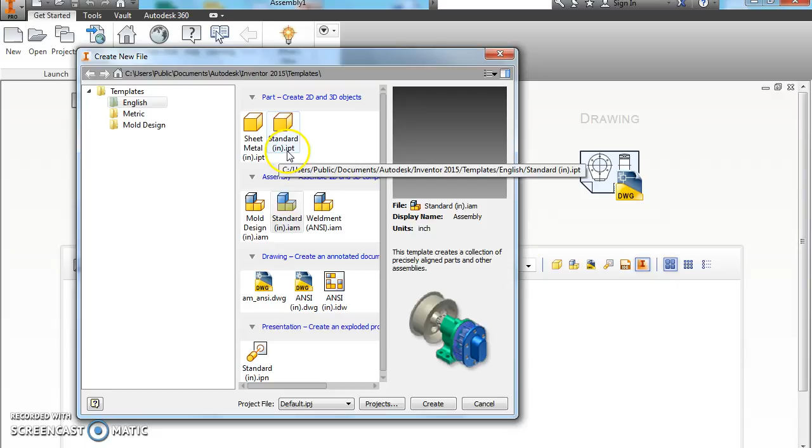Which is inventor assembly, is what that means. So click that, create. It's going to look different for you.

Okay, yours may say place from content center at the beginning, and if it does, you don't want that, so you need to change it to just say place.

Okay, and it's going to bring up, hopefully you've saved everything in that correct folder like I've asked you to do throughout class. Okay, so it brings up all your files.

You can see I've got multiple files of everything I've done for you all when making these lessons and things like that.

The first thing we want is the assembly plate. Okay, make sure it has the 3 spaces in it. One should be a square, one should be a circle, one should be a triangle.

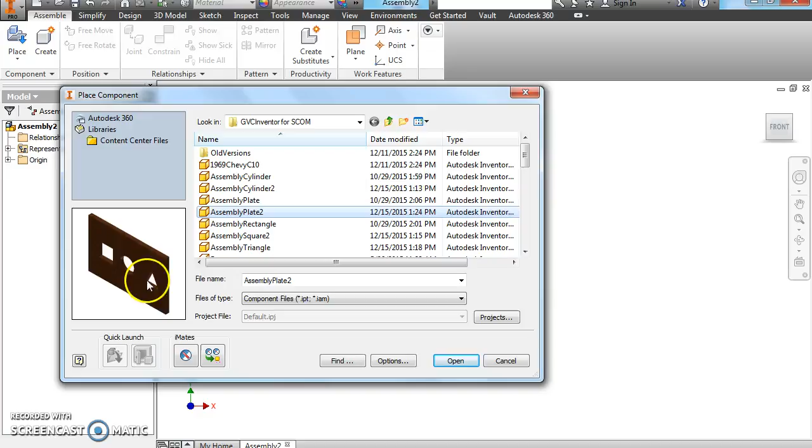Hit that and open that, and it's going to look really big. Click it one time, it places it. Then you have another one. You only need one of these, so right click and check the green check that says OK.

So now you have your plate that you've made. Okay, this is going to be the basis for our assembly file.

If you click and hold, it will move around. Okay, that makes it tough when we do constraints, so we don't want that.

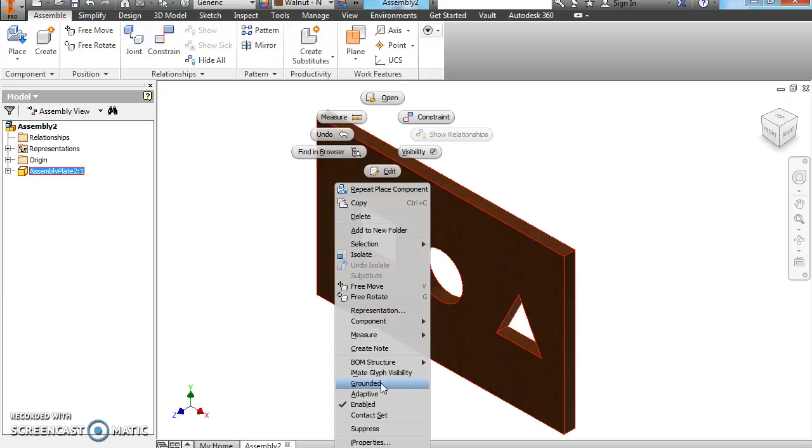So what we're going to do, click on the figure, right click, and where it says grounded, click that. And what that does, it makes it stay. You can click and hold now, it doesn't move. Right click, you can check and see that it's grounded. Make sure you do that before you place any more files.

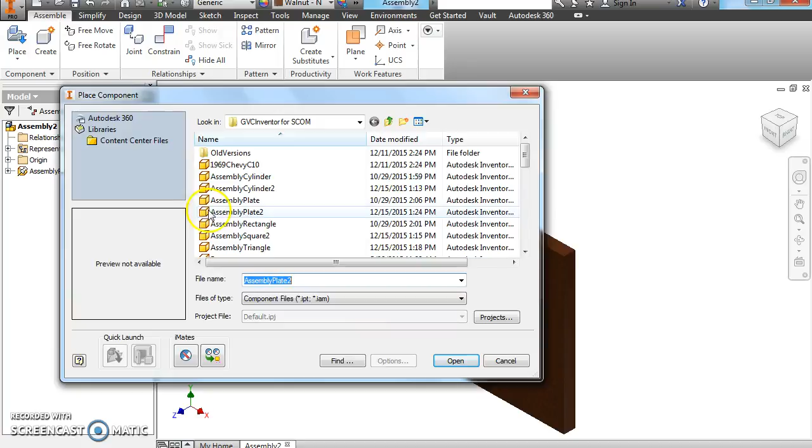Okay, we're going to go and we're going to work left to right here. So the first thing we want to place is the square. Okay, should be a 2 by 2 square. I think we extruded it 3 inches, maybe 4.

Hit open, put that in there. You only want one, so again, right click and OK. You can move this around and go anywhere.

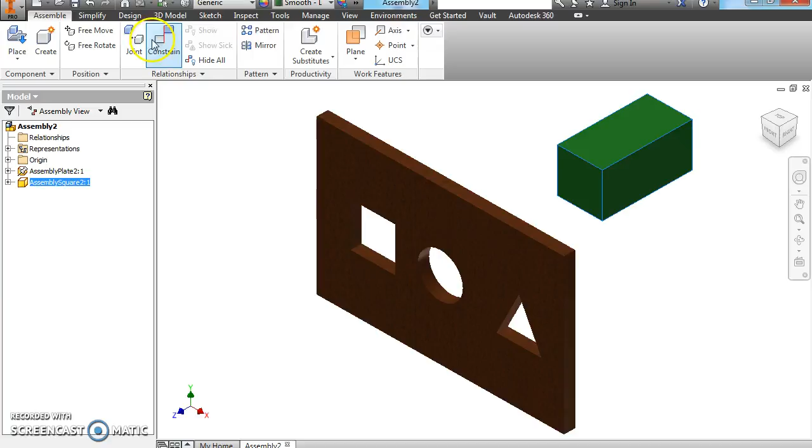Our goal in this video, we're going to put the square peg, I'm going to call it, in this hole. And the way we do that is by constraining it. Okay, with a rectangle, or a rectangular prism as this would be called, you have to constrain at least 2 sides.

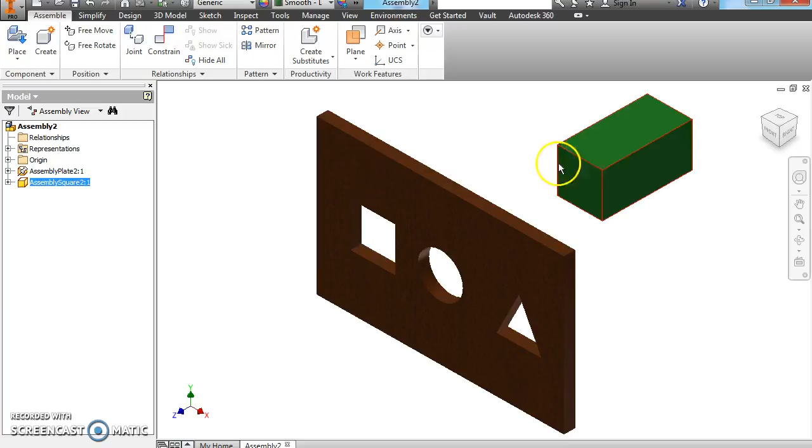Okay, just for extra practice we're going to do all 4 so that you're familiar with that, and when you do your playground later you'll make multiple part files and then do an assembly and have to do constraints as well. So click on constrain.

You want to mate, and you want to keep it a mate. You don't want it flush because we want this to move still. Okay, now this is where it gets very difficult here, so you have to maybe even make a little list and check it off as you do it. You're going to be moving things around a lot. You're going to use the trackball to zoom in a lot and things like that.

The first thing I'm going to do, I'm going to constrain the top of this. So I click that. See how the arrow's pointing up?

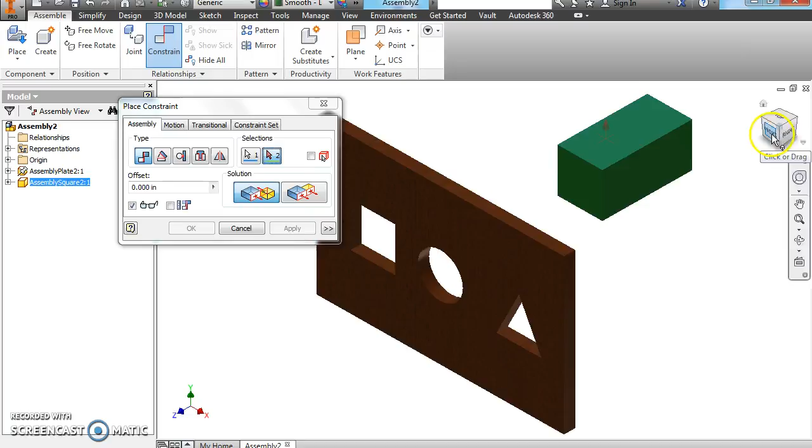Now you've got to move your mouse because I want to see not this line, but I want to see the top face there. So I'm going to grab and hold my cube and I can move it, and then I want that, so I'm going to zoom in with my trackball.

I'm going to click that. Should hear a little popping sound. Hit apply and close that.

So now watch, it moves around a little bit, which is good. So the top is constrained here.

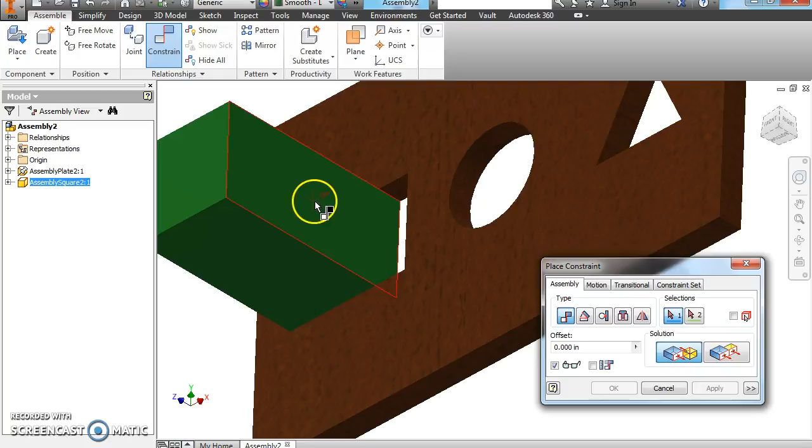Okay, the next thing I want to constrain is this side. Let me move this. This side right here...

...to this side. And again, you've got to be good moving this view cube around, and also you can zoom in and out. It makes it much, much easier. Again, you hear that pop.

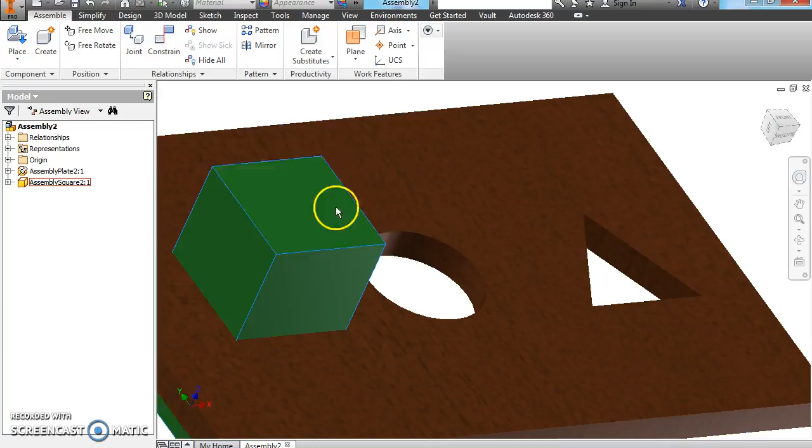And now it's staying in there. Okay, but just for practice, I want to constrain these other sides because when you do more difficult files, you need to do it each way. So click on this side, and we know it's going to be stuck to here.

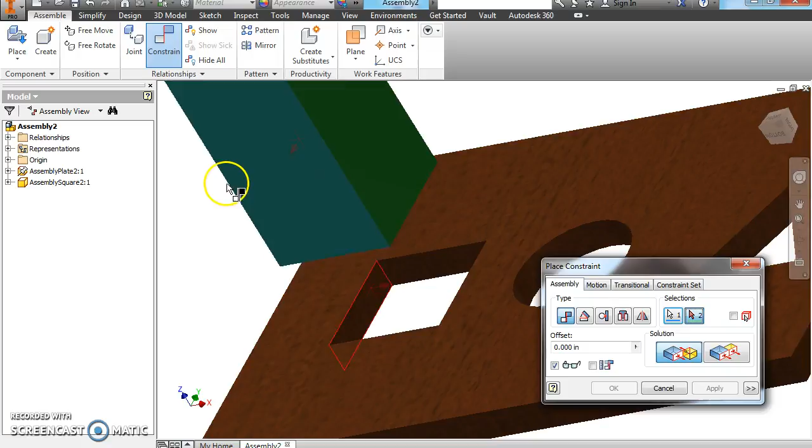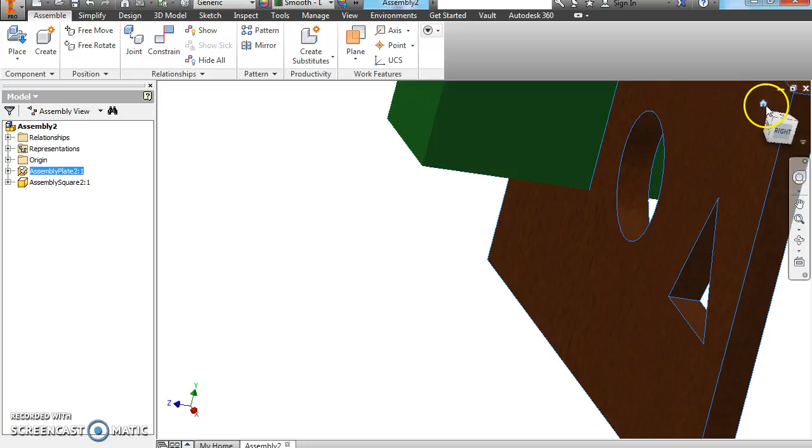Hit apply, and let's see, it still goes up and down through there. We've done the top, we need to do the bottom. Constrain this face. And sometimes you got to be real careful to this face and hit apply. Okay, so now my square prism, or rectangular prism, is going in there. It won't move anywhere else, which is what we want.

If this was a pegboard toy, you'd use a little hammer, knock this down. Okay, you probably did that as a little kid.

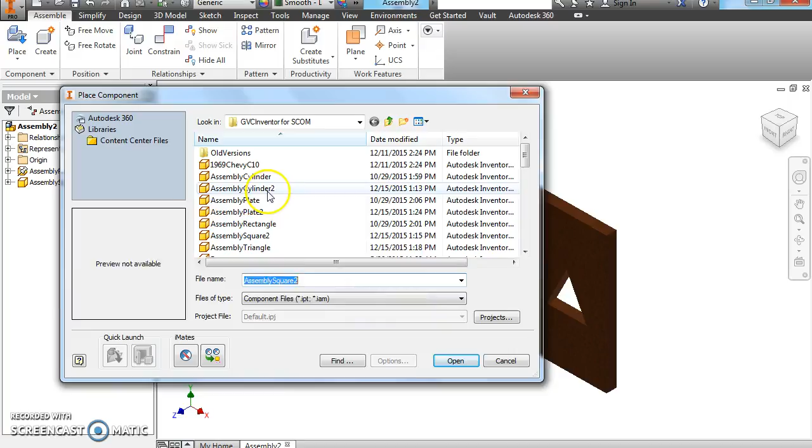The next thing we're going to do is we're going to insert the cylinder. So we're going to place that. And I'll be honest with you, this is much, much easier. It's only one constraint. Okay, place one, right click and hit OK. You don't need two of those in there. We're going to do a constraint again.

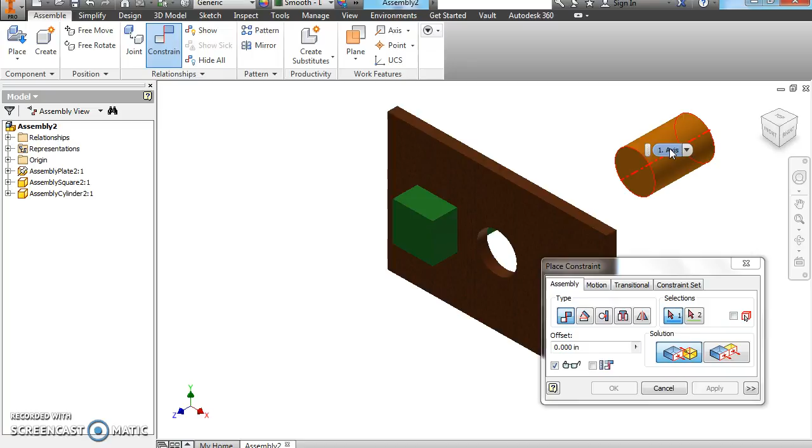Okay, this time you don't want this face, because with cylinders you can do inserts. You want the whole cylinder. It should have the red dashed line passing through the center of it. Okay, click that, and then you want to represent the same thing here. Okay, the red dashed line, hit apply, or click it, you'll hear the popping sound, hit apply, and then now that's going in there. Oops.

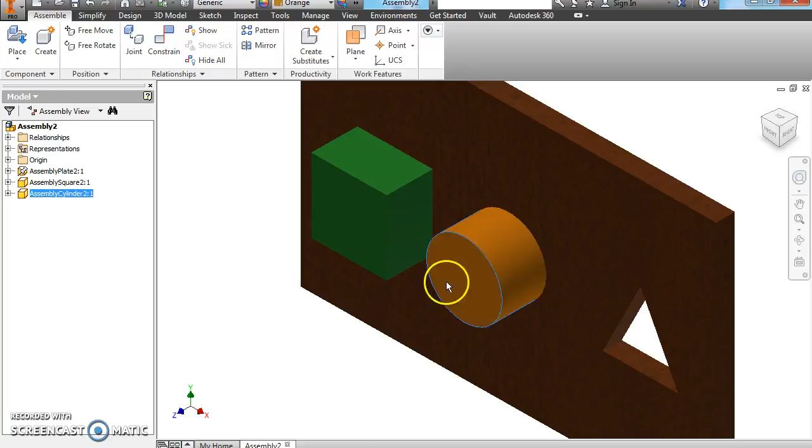Okay, so it stays in there. My square still does the same thing. Okay.

The last thing I'm going to do is do the triangle and put it in there. Okay. If you were going to assemble a table or anything like that, you could draw the tabletop, make the legs, one leg file, and go in and insert those. So assembly files are very, very useful.

The next thing I want to do is place my triangle. It was a 2-inch equilateral triangle. Each side's 2 inches. Okay. So again, we're going to constrain. I'm going to start on the bottom.

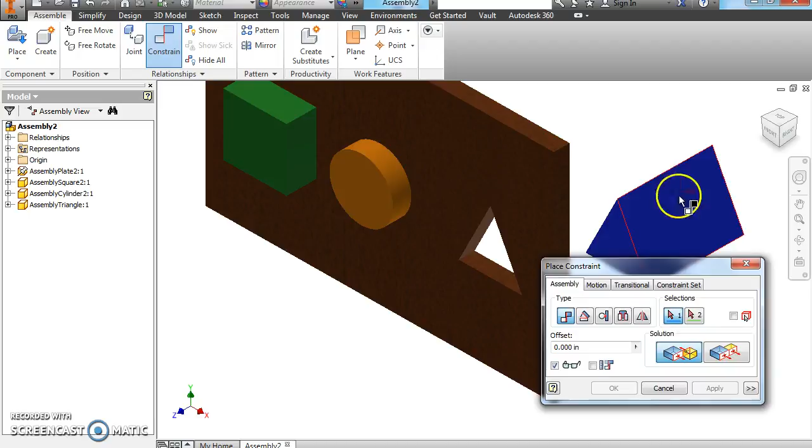So bottom, move this around. Grab your view cube and move it where you can see. Let me zoom out there. Okay, it's in there right now. Let's see what happens. But it can go left to right, right to left, up and down. So just the bottom's constrained. It's not flipping over. So there's a little bit more work to do.

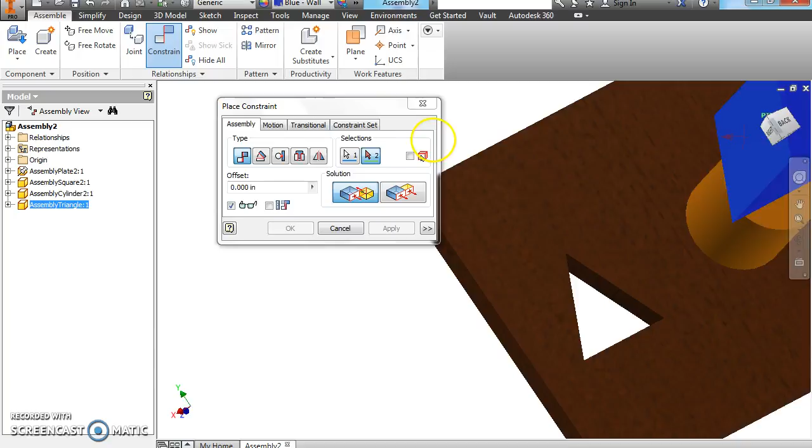We're going to constrain this side. And again, grab your view cube. That's going to be tough. Okay. This side. This is the toughest part about it. Okay.

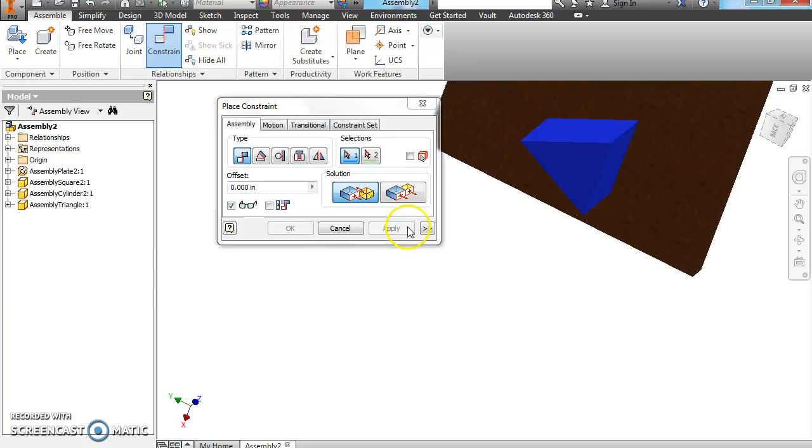To that side, hit apply. So I've done the bottom and this side, and it should stay in there, but just for extra practice, let's go ahead and do one more constraint. Okay. The left side to the left side, hit apply, and we should be done.

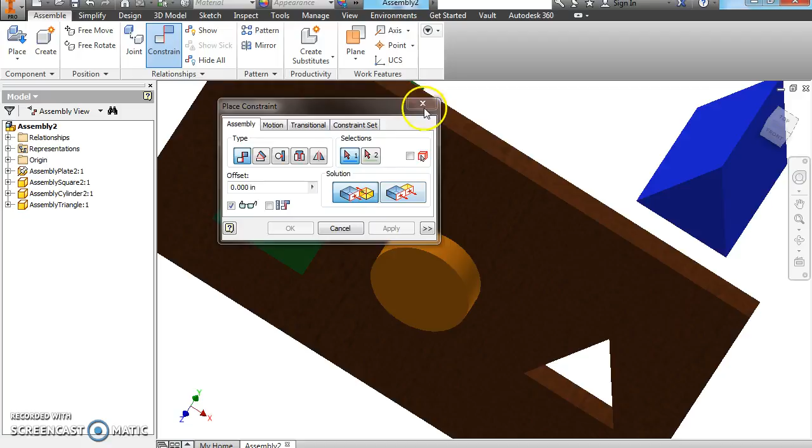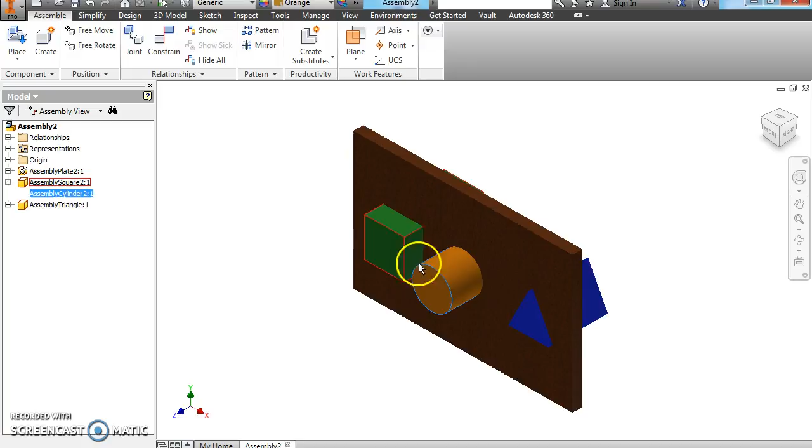Okay. And now this is your finished file. If you try to do one constraint, if you try to repeat it, it won't let you do that. It'll pop something up and say, cannot apply this constraint, edit relationship. If that happens, just raise your hand and usually we just back it up and undo and start over kind of on your constraints. But as you can see, as you move these part files, they all stay there.

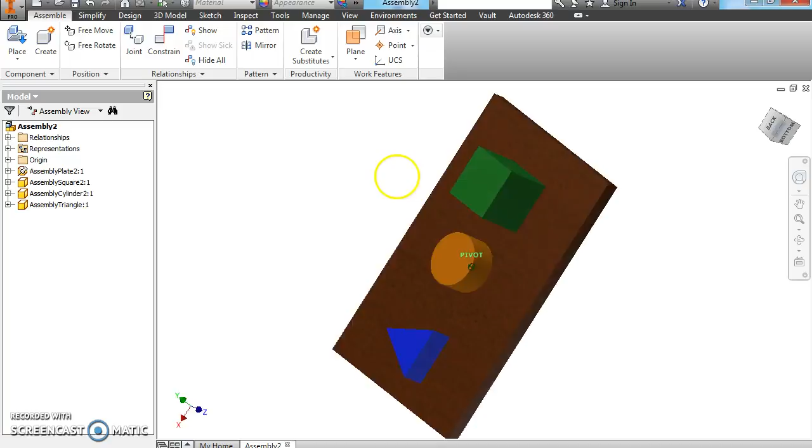Okay, so this is what's called an assembly file. There's some people that are really creative with Inventor, engineers, college students, even middle and high school students. I've showed you the mini train. That's one of them.

When you're on your playground time, you're going to do some assembly files and kind of just practice on your own. When you get some time after you finish your lessons, it'd be a good idea. Find something at the house or think about it and make an assembly file. Okay, it's really good practice. Probably the best, toughest thing to do, but it's really practical and really useful. Okay, and it'll help you in the future if you plan on staying in the PLTW classes.